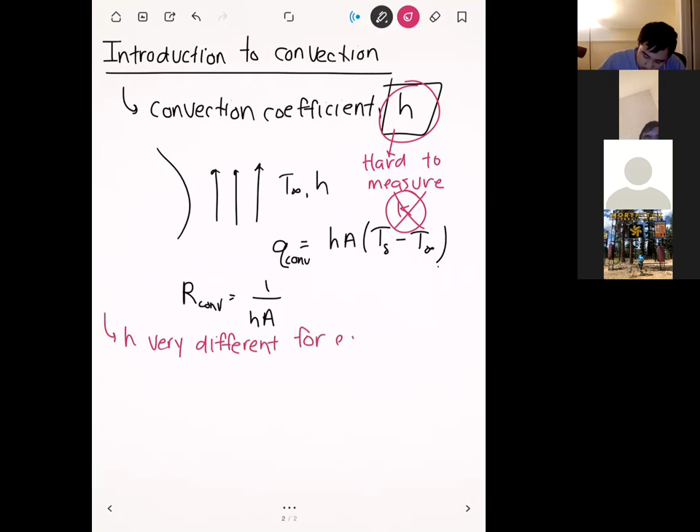And so in reality, h is not something we can just look up in a book, because h is going to be different for every situation. Okay. And I think where we left off was this expression. We talked a lot about boundary layers last time, the velocity boundary layer and the thermal boundary layer, how they interact, and we ended up with this expression for h. It's not a very useful expression, but it will at least tell us some of the things that h depends on.

Okay. So this is the formula that we got for h, based on our boundary layers. And this expression basically tells us that h depends primarily on two things. The first thing that it depends on is kf, the thermal conductivity of the fluid. So that's basically just the thermal properties of the fluid itself. If your fluid naturally conducts heat more easily, that's going to lead to a bigger h, and that makes sense, right?

Okay. And this other quantity right here, partial T partial y at y equals 0, is the temperature gradient next to the surface. And this is usually difficult to compute, because it's a property of the boundary layers, a property of the fluid flow. That's why most of the time we don't actually use this expression to compute h. But it at least gives us an idea of what h really depends on.

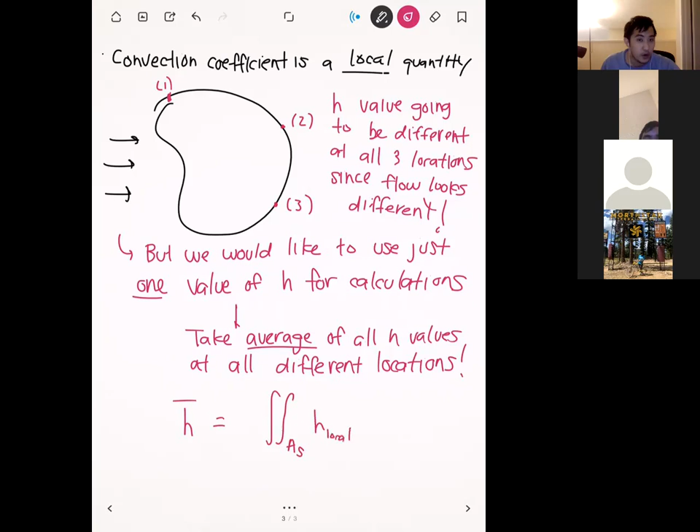If we take a double integral over a surface, and then we integrate that local h, or in other words, we're integrating all the different values of h at different points on our surface, we integrate that over a surface, and then we divide by the area. This is essentially how we would get the average h over an entire surface.

And so I will say that in terms of hand calculations or analytical methods, which is what we're doing in this class, this integral is usually too much trouble to do by hand. And so usually people will typically run a computational simulation, like either a CFD or a coupled CFD and heat transfer simulation.

And then once they get the results of that simulation, you can compute h locally all around the simulation, and then you can ask the computer to perform this integral for you. Right? And so normally this kind of integral, if you're doing more than just a single integral for any practical situation, is usually not feasible for a human to do. And so a lot of times these calculations are done via computer.

But at the very least, I want you guys to make this distinction between the average h, which is what we have been using, versus the local h, which is what it is in reality. Okay, any questions on this?

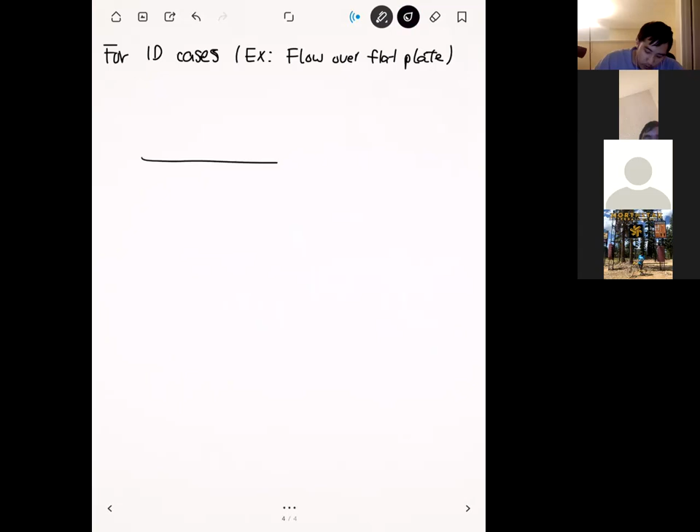Right. And so we have a flat plate that looks like this, and we have flow coming in just like that. So we have basically just one direction here, just the x direction, right? And we can say that the length of the plate here is L. In these one-dimensional cases, we can actually compute the average one because we're just integrating over one surface, right?

And so the average h in these simple one-dimensional cases is just going to be 1 over L times the integral from 0 to L of h local of x dx. Okay. And we'll do an example of this very soon.

Okay. And so even though the general case, like that surface integral that I showed you on the previous page, is a little bit too complicated to do by hand, for a simple one-dimensional case where we're just integrating in one direction, these we can actually do. And I'll show you an example of this very soon.

Okay. And so that's an introduction to h, and not only what things h depends on, but also the fact that h can actually change at various locations on the surface, right? Now let's introduce the actual problem of convection heat transfer, which is what we're going to be working on over the next few weeks.

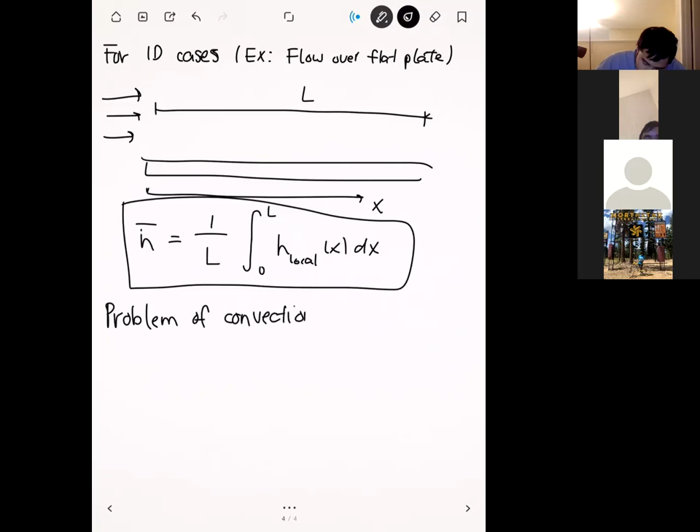And so, this problem of convection heat transfer, when you state it, it sounds fairly simple, right? But actually computing this is really complex, right? And so the idea behind this problem of convection heat transfer is this.

Because once you know H, let's say the convection coefficient for your entire surface, once you know that, then you kind of know everything that you need to know about the convection heat transfer, because then you can use any of the methods that we went over in the last unit. So you can either use thermal circuits, you can use the heat equation, right? Once H is known, then you're basically good to go.

Okay? The problem is H is seldom ever known well, right? And so, the problem of convection heat transfer is to solve for that H. And so over the next few weeks, we'll be looking at lots of different methods that we can use to solve for H. Right?

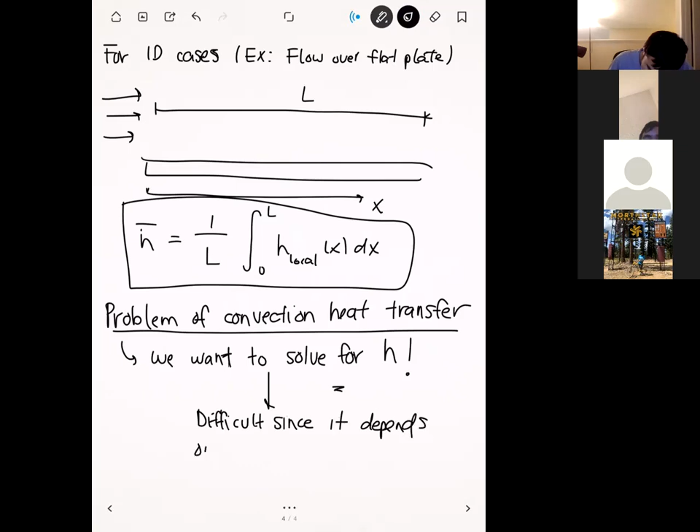And so in some sense, we're going to take a little bit of a break from all the things that we've done up to this point, and really just focus on ways that we can solve for H. Okay. And just like we talked about before, this problem of solving for H is really complicated because it depends on so many different things. Right? It depends on so many factors.

In fact, over the next couple of weeks, we'll spend one week talking about flow over an external plate, and then we'll spend another week talking about internal flow situations like flow in a pipe, right? And so coming up with a general rule and general way to solve for H right now is impossible. It's too complex for a general approach.

But for certain situations that show up pretty commonly in engineering, there are some methods out there, and some of them are based on experimental findings combined with some analytical approaches as well. Okay, and so when people talk about the problem of convection heat transfer, they explicitly are talking about how do we actually solve for H. Okay. All right. Any questions on this before we jump into a quick example?

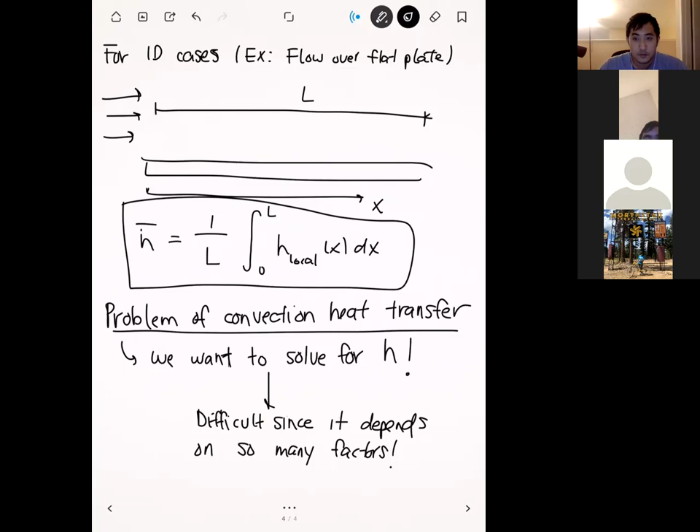Okay. All right, and so in this example, let's do a quick computation for how we can actually compute the average convection coefficient, right? All right, and so in this example, we're going to have flow over a flat plate. Okay. So this situation looks like this. And so we're going to have fluid that's going to be blowing in from this way.

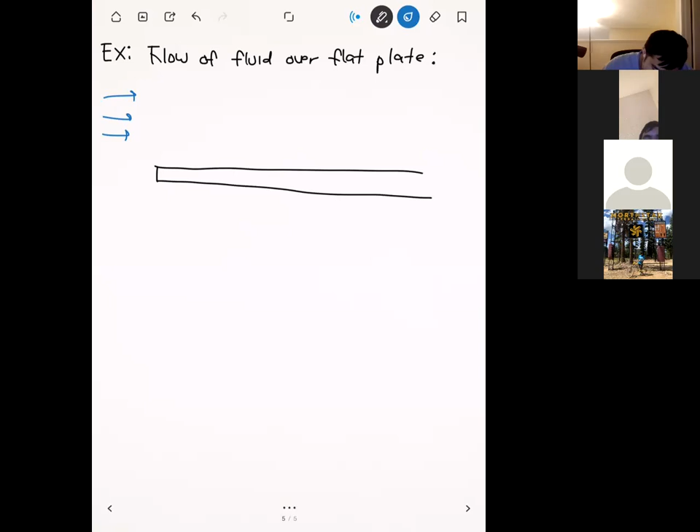Okay. And just like we talked about a week ago, once this fluid starts contacting the plate, what's going to happen is that a boundary layer is going to form. And so this line that I drew here, this is the fluid boundary layer. Okay. Where this blue line in particular, this is the boundary layer thickness. But remember, we gave it the symbol delta.

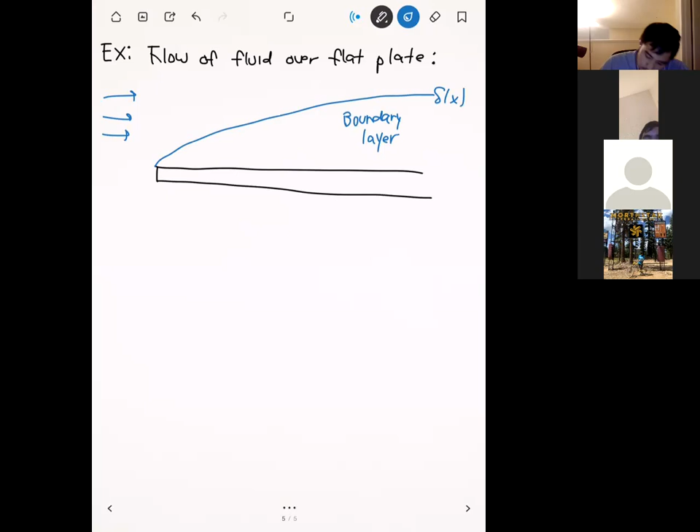Okay. And so let's say in this particular situation, for this flow over a plate, some experiments were done, and they were actually able to determine the local convection coefficient. Okay.

Okay. And so this local convection coefficient is going to be a function of x because it's going to depend on where you are. It's a function of x, right? And so we'll say that h of x is equal to a times x raised to the minus 0.1 power. Okay? Where a is just some constant.

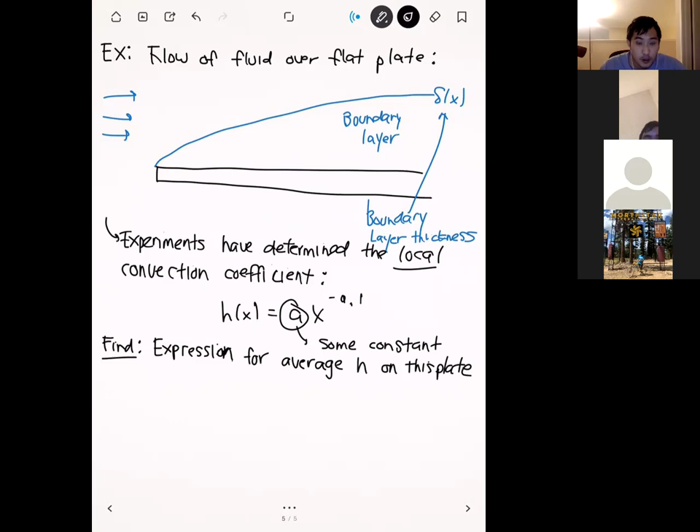Okay. And so to find the average h, we're going to use our formula that we had two pages prior, right? We're going to have h bar equal to 1 over L, integral from 0 to L of h local of x dx. Right? And then we're just going to take this expression here, plug it in for h local, and then perform the integration.

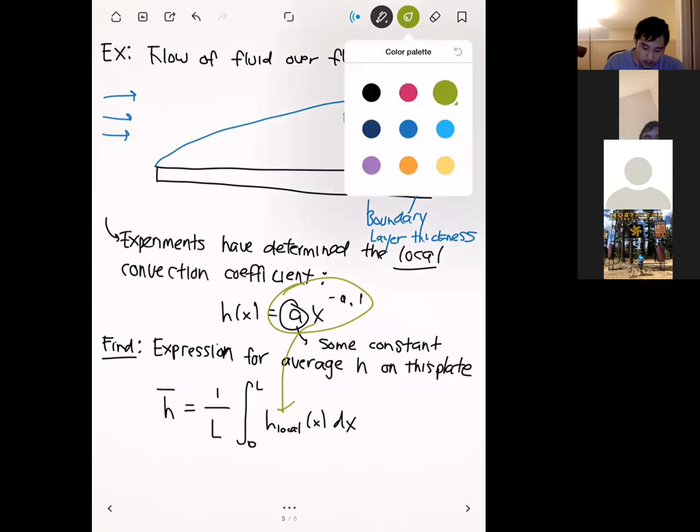Okay. So let's go ahead and do that on the next page. We have h bar is equal to, after we plug in for h local, a over L integral from 0 to L of x raised to the minus 0.1 power dx. Okay. At this point, we can integrate. If we perform this integration, we have a over L times x raised to the 0.9 divided by 0.9, evaluated from 0 to L.

Okay. No question. Oh, back one page. Yes, I can. Okay. Are you good? Okay.

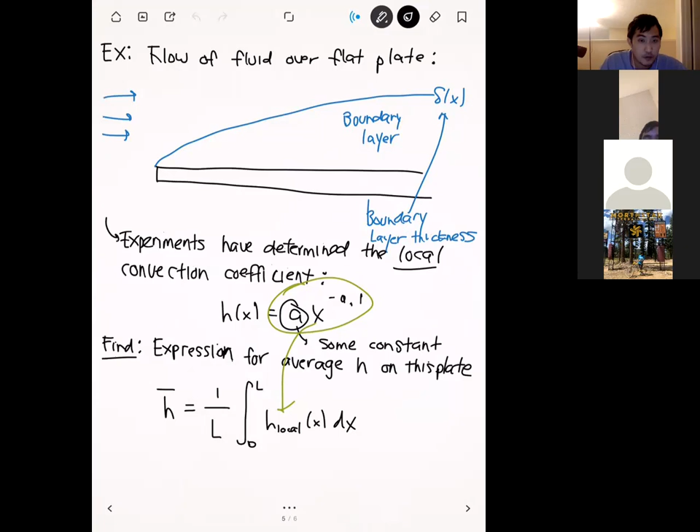Okay. And so if we evaluate this integral from 0 to L, we get h bar is equal to 1.11 a L raised to the minus 0.1 power. Okay. Right. And so this is basically the average h that we can use in calculations. Okay.

And so when you're using the methods that we'll talk about over the next few weeks, and you see that your h is a function of x, you can't use that h directly in some of our older methods, because our older methods assume just one single value for h. So in order to use our old methods, you have to take an average of h over the entire surface. Okay. All right. Any questions on this?

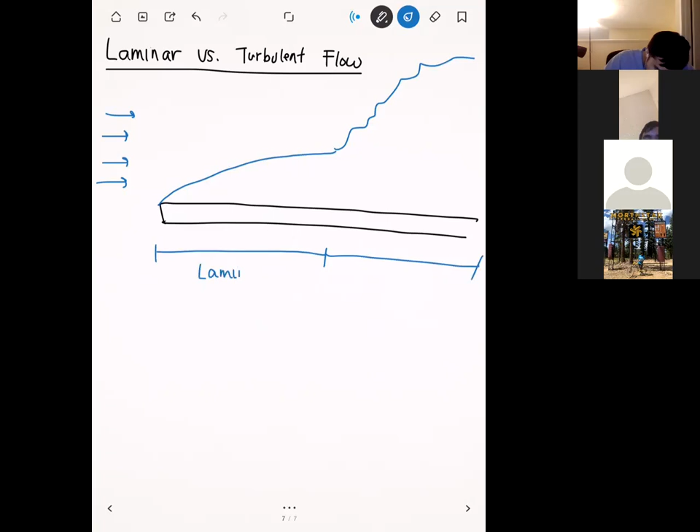And once the boundary layer starts to go crazy, we separate that from the initial part, right? This initial part of the boundary layer, where our curve is growing nice and smoothly, we call the laminar region. And where the flow starts to get a little bit crazy, we call the turbulent region.

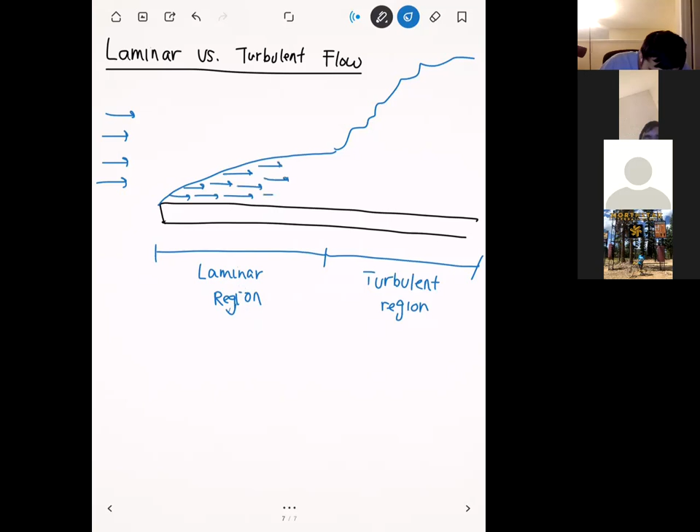And so if you look at the actual nature of the flow in these regions, you should see a stark contrast. Right? In the laminar region, the flow looks very nice and orderly. We have flow that's going parallel to each other. It's laminar. Okay? If you draw some of the streamlines, they look like this. You have a bunch of straight lines going like that.

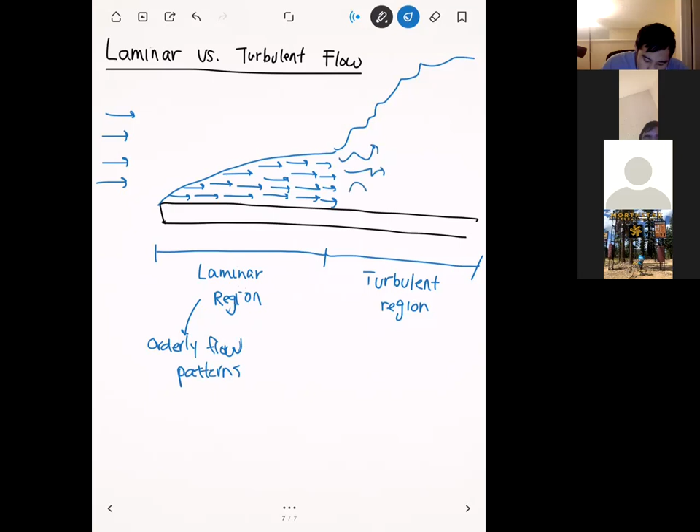And so whenever someone talks about laminar flow, basically what they mean is the flow patterns look orderly. Okay. If you contrast this with turbulent flow, it's going to look like this. Instead of being nice and straight, the flow patterns start to look really chaotic. Right? You're going to have flow that's zigging and zagging, maybe recirculating. It's going to do all these crazy things.

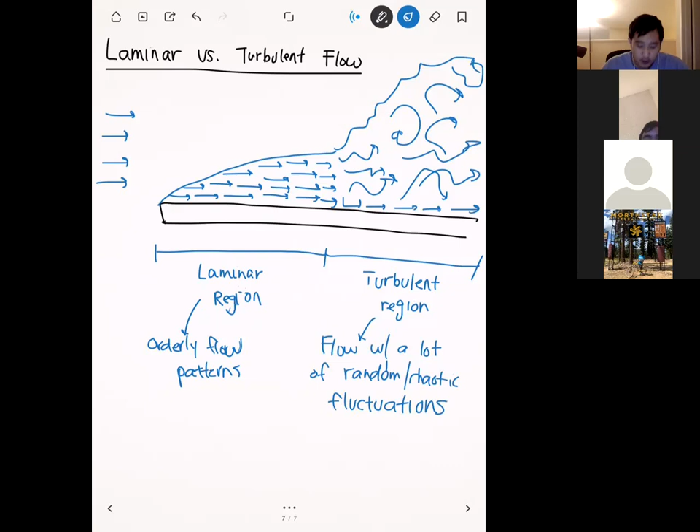Okay? Next to the wall, though, usually the flow is pretty parallel to the wall. But once you get farther away from the wall, the flow starts to get a lot more chaotic. Right? So when we talk about turbulent flow, I mean flow with a lot of chaotic random fluctuations. And I bring this up because these flow patterns are going to have a dramatic impact on the convection heat transfer.

Okay. And so it's going to be really important for us, once we start doing these convection problems, to characterize the flow, right? And so what you'll see is that if we find that we have laminar flow, that's going to allow us to use a certain set of equations and a certain kind of problem-solving methodologies. Versus if we have turbulent flow, that's going to drive us down a different path with different equations and different methodologies in order to solve the problem.

Okay? And so, beyond this, this is kind of all the fluid mechanics that you would really need. So just to summarize, whenever we say laminar flow, what we mean is nice and orderly flow. And by turbulent flow, what I mean is flow with a lot of chaotic and random fluctuations, right? And whether the flow is orderly or chaotic is going to have a big impact on our convection heat transfer.

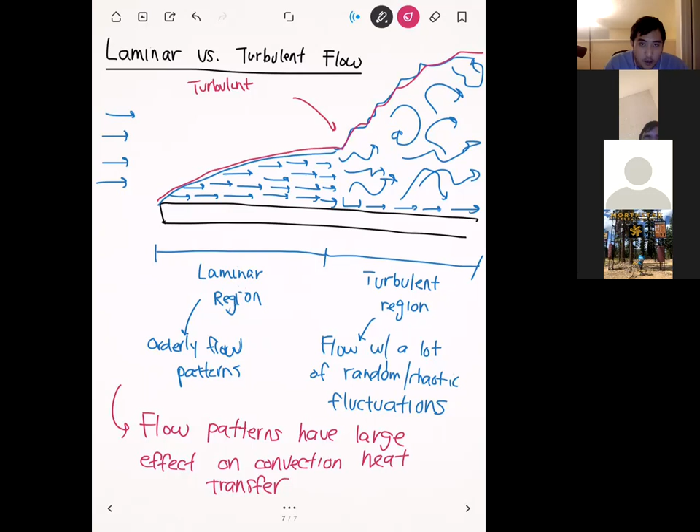Okay? One other thing that I want to note here before we turn the page is that if you notice, once I got to the turbulent region, the boundary layer just starts to jump up like this, right? And that's by design. And the reason for that is, whenever you have a turbulent flow, turbulent boundary layers will grow a lot faster.

And just like we talked about at the beginning of lecture today, where we stated that the value of h depends on the nature of the boundary layer, the fact that the turbulent boundary layer grows a lot faster is going to have a big impact on the results as well. Okay. Any questions on this?

So for the turbulent, it has a chance of pushing the heat back to the source? Well, we'll talk about that more in a bit. So actually, the fact that we have these random fluctuations is actually going to help. Because more often than not, more fluid can be pushed away from the surface. And that's why you see the boundary layer grow a little bit faster. Because any fluid that goes towards the surface is basically just going to bounce and come back up. And so you have a net flow upwards. And that actually enhances heat transfer. Okay, thank you.

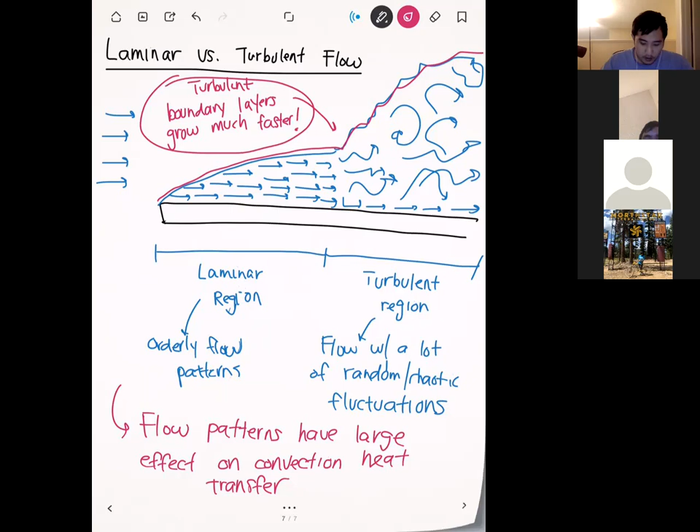Okay. And so now that we've seen the difference between laminar and turbulent boundary layers, we can see that it's going to be really important for us to determine whether a flow is laminar or turbulent. And so the way we do this is we compute a non-dimensional number called the Reynolds number. Okay. And so if you remember from fluids, the Reynolds number is given by this expression right here. And we usually give it the symbol Re.

It's computed by taking the density of the fluid multiplied by the velocity, then we multiply it by some length, and then we divide it by the viscosity. If you're given the kinematic viscosity of the fluid, which is simply dynamic viscosity divided by density, another expression is the following: we take U times L, and we divide it by nu. Okay. And so let me label all of the terms here. First we have rho, and this is simply density. U infinity right here, this is the free stream velocity.

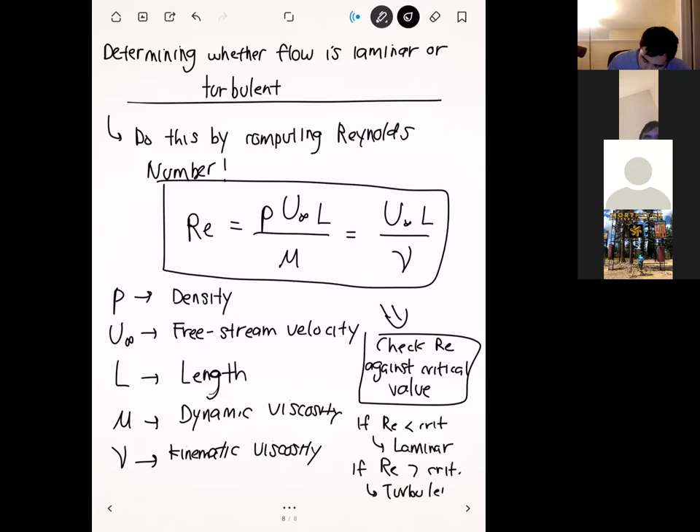And if the Reynolds number is less than the critical value, what this tells us is that we have a laminar flow. But if the Reynolds number is greater than the critical value, then this tells us we have turbulent flow. And so that's all it is basically.

And so, to determine whether a flow is laminar or turbulent, all you're going to have to do is compute the Reynolds number and check it against the critical value. If it's less than that, you're laminar. If it's greater than that, then you're turbulent.

And so, what the critical Reynolds number is really depends on the situation. External flow situations have a certain critical Reynolds number. Internal flow has another critical Reynolds number. So depending on the situation, we're going to have a different value for the critical. The idea is the same: you're always going to compare the Reynolds number to this critical one and use that to determine if the flow is laminar or turbulent.

Okay. Any questions on this? Okay.

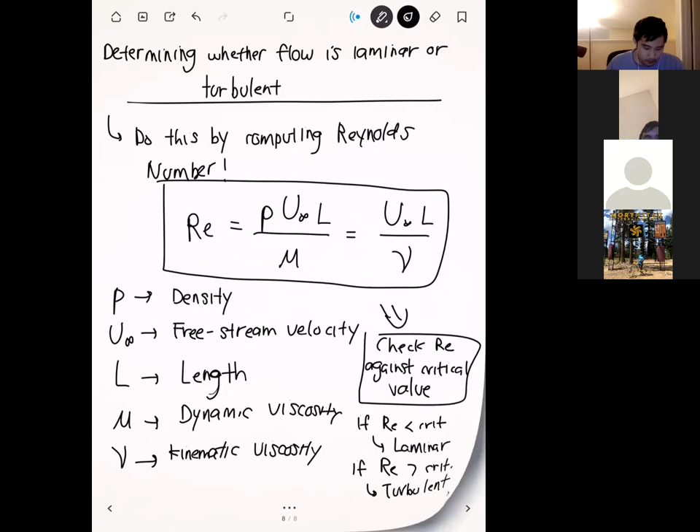And so, now that we've talked about laminar and turbulent flows, let's talk a bit about how the velocity and temperature vary within the boundary layer. In particular, how these things vary in the presence of laminar flow versus turbulent flow, because depending on the nature of the flow, these things are going to look different. So let's start with velocity.

If you remember from last week, in the boundary layer the velocity varies from 0 at the plate up until the free stream velocity. So let me draw two situations here. On the left, I'll draw the laminar situation, and the turbulent one. The endpoints are going to be the same. For the laminar case, here is our plate, and at the plate we're going to have 0 velocity.

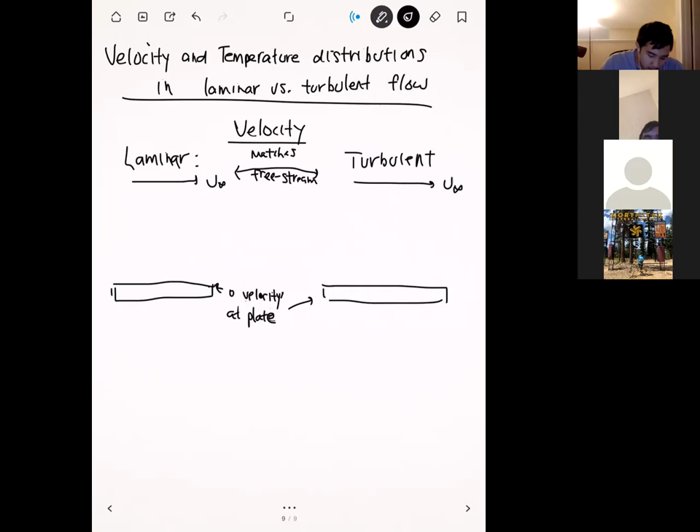So if we travel a certain distance away from the plate, the velocity matches the free stream. The endpoints are going to be the same, but how they vary from the plate up until the free stream is going to be different. For a laminar boundary layer, what you have is a very nice gentle variation from the plate condition to the free stream. It almost looks like a parabola.

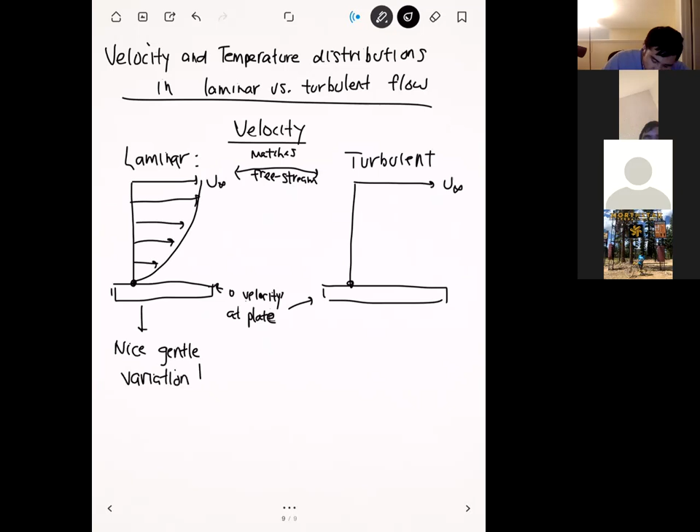So here we have a nice gentle variation between the plate condition and the free stream. For the turbulent one, it's a little bit more violent. In the turbulent boundary layer you have a very large change very quickly, and then from there it kind of tapers off just like that. So what you have here is a rapid change initially. Then after that rapid change, the change starts to slow down.

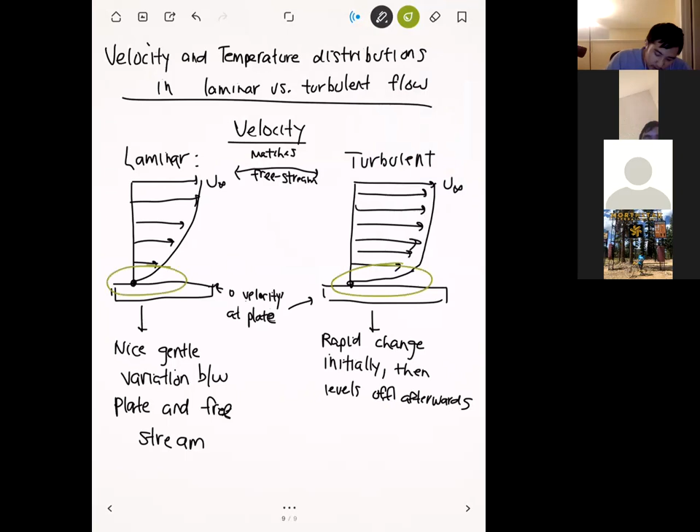All right. So even though the endpoints are going to be the same for the laminar and turbulent boundary layer, how they get there is going to be different. And the significant thing, relating this to what we talked about at the beginning, is if we look at the region right next to the plate, you should see that when you have turbulence, this near wall derivative or near wall gradient is much more extreme.

Remember, we characterized this near wall gradient with partial u partial y. If we have turbulence, then this du/dy is going to be greater. And if that derivative partial u partial y is greater in turbulence, that's going to give us a higher amount of viscous shear stress, because viscous shear stress depends on the viscosity of the fluid and also that near wall gradient.

So if you covered boundary layers in your fluids class, hopefully one thing you talked about was that if you have turbulent flow, then you have a higher viscous friction force. And the reason why is because you have much sharper velocity gradients next to the wall compared to the laminar case.

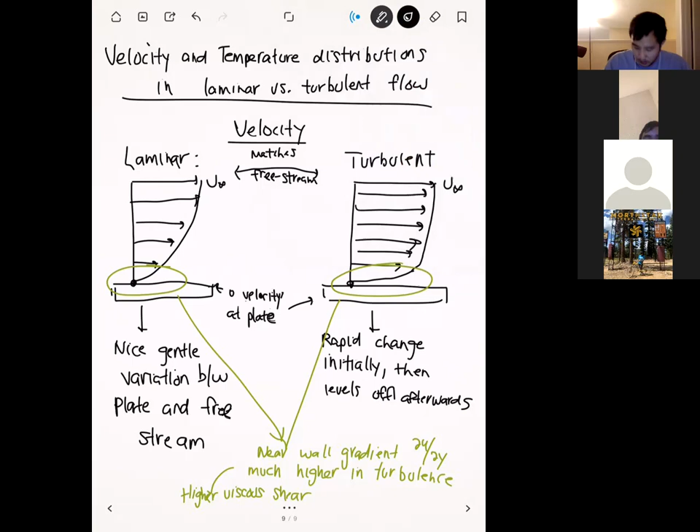Okay, so this was the variation of velocity in a laminar versus turbulent boundary layer. Now we're going to do the same thing for temperature, and then we'll talk about how that affects the convection heat transfer. All right, any questions on this? Okay. All right, so let's look at temperature.

Just like the velocity, I'm going to draw two diagrams here: one for laminar flow and one for turbulent flow. We're going to have a plate condition, and the plate condition is going to be the same in both cases. In both cases, the plate is going to be at a temperature Ts.

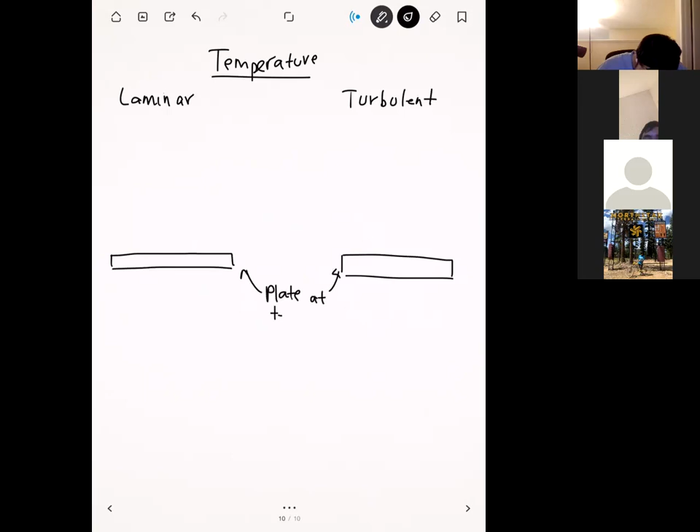Okay. Right, and so we have Ts on both sides. And then just like the velocity boundary layer, at the top of this graph, we're going to have the free stream condition, which is T infinity. Okay. And then we'll say that the free stream temperature we'll assume is less than the surface temperature. Right?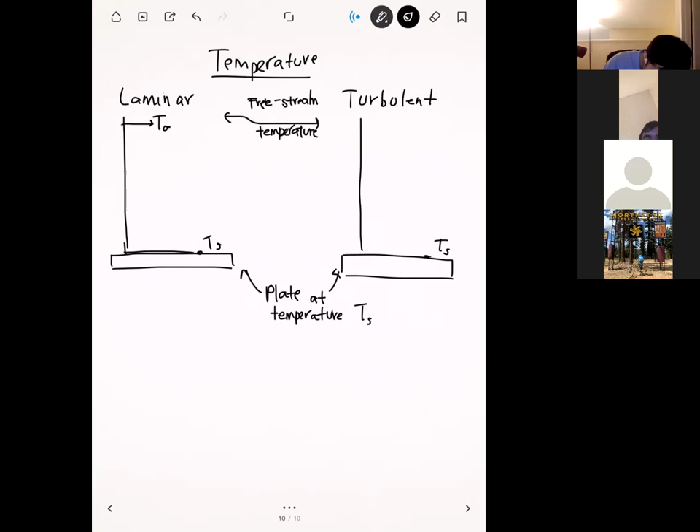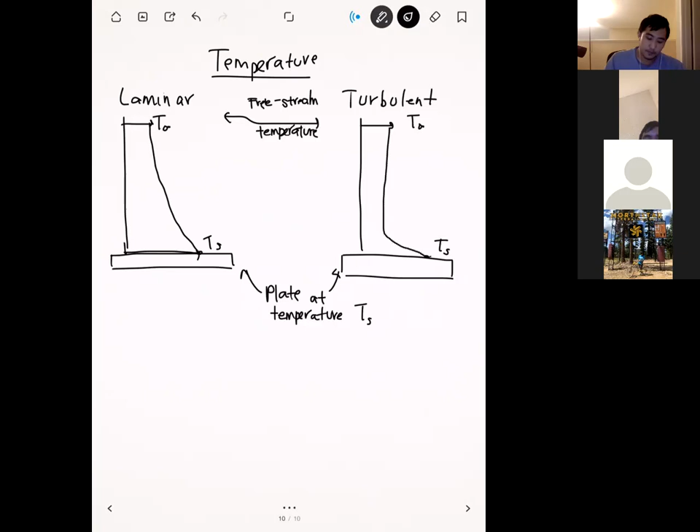And so, just like the velocity case, we have the same endpoints here, but what's going to be different is how they're going to vary, right? And so just like the velocity case, if you have a laminar boundary layer, what you have is a nice steady change in between the two. Okay? Versus if you have a turbulent boundary layer, you're going to have a rapid change at first, and then it's going to taper off after that. Right? So it's going to look more like this. Okay? And so this is gentle variation. And so when you have turbulence, this is much more violent and much more rapid. Right?

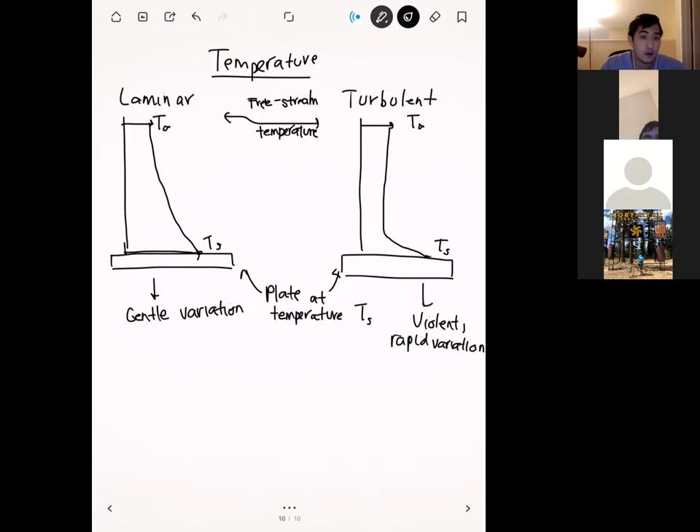Okay. Right. And once again, what you should see is that in the near wall region, if you have turbulence, that's going to increase your wall gradient, right? And so if we compare the values of dT/dy at both cases, this is for laminar, and this is for turbulence, right? So we compare the derivative of temperature near the wall. What you're going to see is that dT/dy in the turbulent case is going to be much, much higher. Okay?

And if you remember, from the beginning of the lecture today, what we saw was that the convection coefficient h depends on this temperature derivative, right? And so because the convection coefficient depends on this, what you'll see, hence, is that if you compare h laminar to h turbulent, h turbulent is generally higher than h laminar. Okay. Okay.

And so, if you want to enhance your convection heat transfer from your surface more, it's better to actually have turbulent flow. Because a lot of the chaos in the flow actually enhances your heat transfer, kind of like what I mentioned before, right?

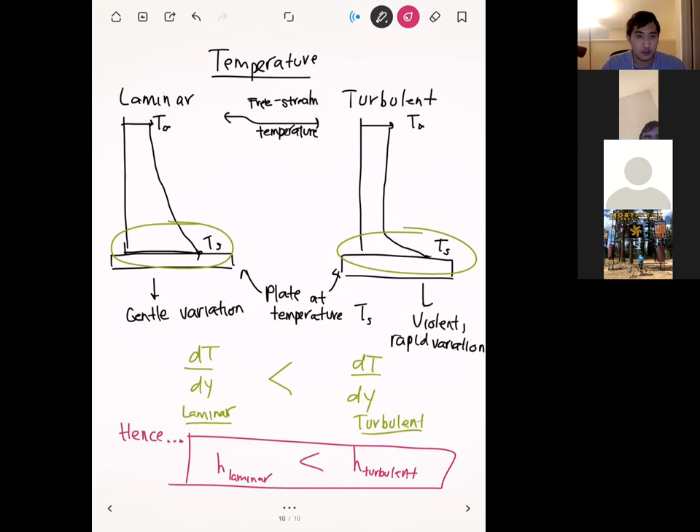Okay. And so let me just write down physically what's going on, or the physical reason why we get more heat transfer in turbulence. Okay. And it kind of boils down to the flow patterns, right? And so if you remember from the original diagram that we drew of laminar versus turbulent, turbulence had a lot more chaotic fluid motion.

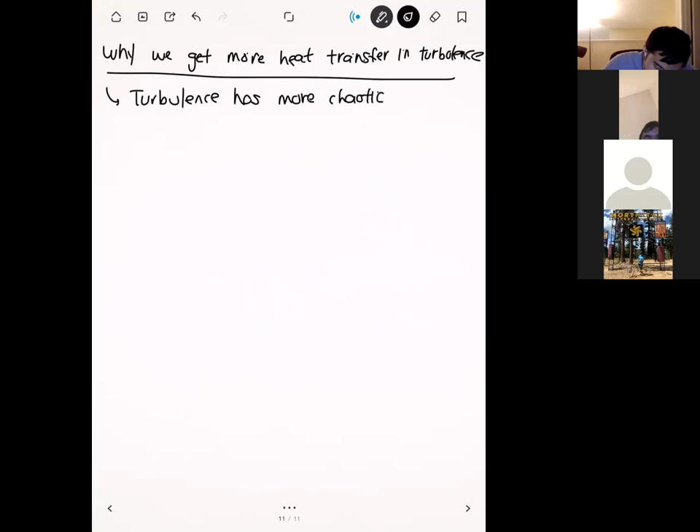And because we have much more chaotic fluid motion, it enhances the mixing of the fluids within the boundary layer. Okay. And so you can think of it as, because we have this chaotic motion and this mixing, fresh fluid is being brought to the surface a lot more quickly or a lot more often than in laminar flow.

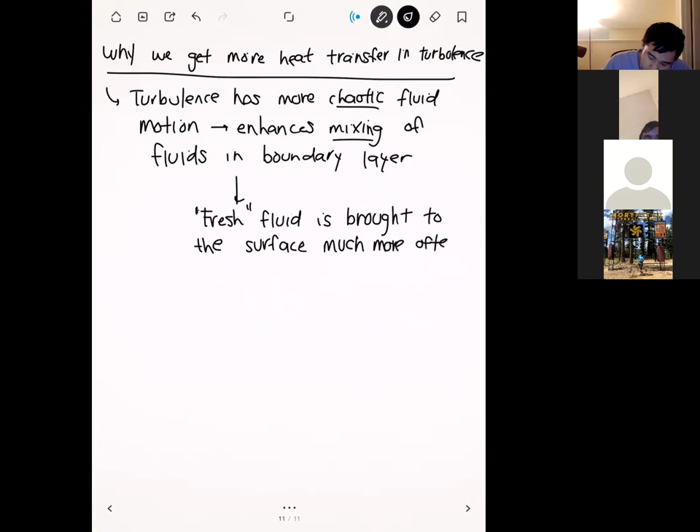Okay. And so if we draw a case right here, right? Let's say I'll draw our two regions here, right? So we'll have laminar and turbulent.

Okay. Right. In the laminar case, what you have is the flow is strictly just going from left to right, okay? And so that's fine. And so what that's going to do is, once these fluid particles heat up, they kind of get swept along the flow that way, right?

But in the turbulent boundary layer, not only is there a bulk motion from left to right, because of this chaotic motion, some fluid from the surface is going to come up here, and some fluid from the top of the boundary layer is going to go towards the surface right there, right? And this is constantly happening because of the chaos.

And so because of that, what tends to happen in turbulent flow is that a fluid particle will heat up. Then because of the chaotic motion, it'll be swept up towards the top of the boundary layer and be replaced with some other fresh fluid that goes down there, right? And so because you have this circulation and chaos, more fresh fluid is brought to the surface, which helps to enhance heat transfer, because then we maximize that temperature difference as much as we can.

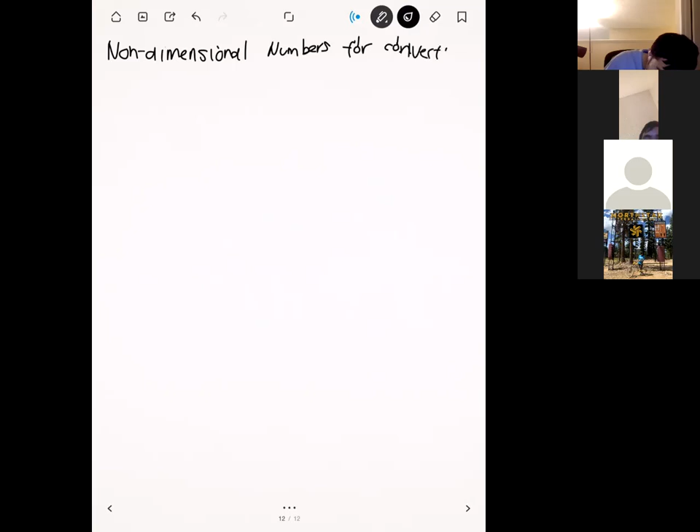Okay, so hopefully you've seen non-dimensional numbers before. Actually, we've already seen one in this lecture, right? Non-dimensional numbers are common in science because they often report a ratio. What I mean by non-dimensional numbers is that they basically have no dimensions. It doesn't have meters, newtons, joules or watts or anything like that. So it's totally dimensionless.

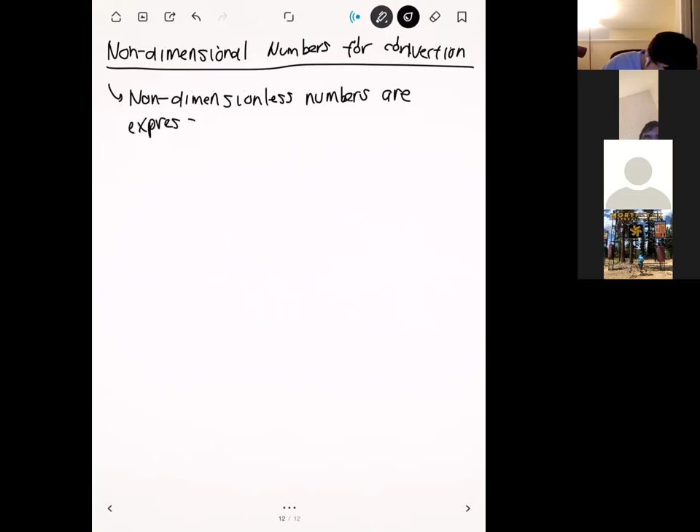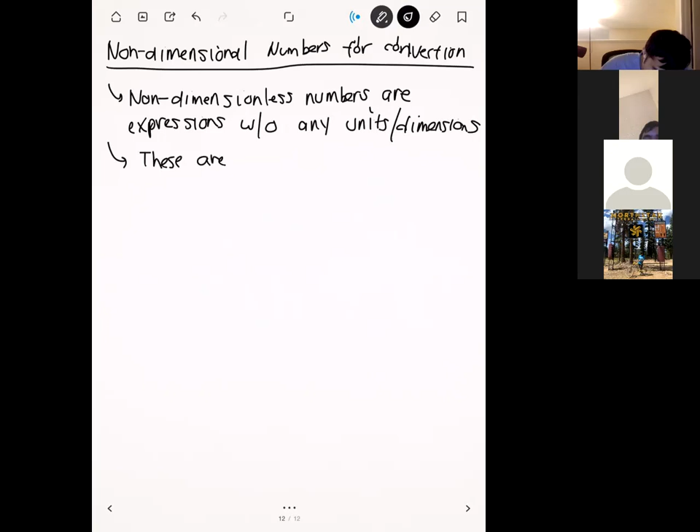And so they have no units or dimensions, and the reason for that is because they're usually ratios, right? A ratio is nothing more than a division between one quantity and another. And oftentimes, just to make sure you're comparing apples to apples, what you have on top and the bottom has the exact same units.

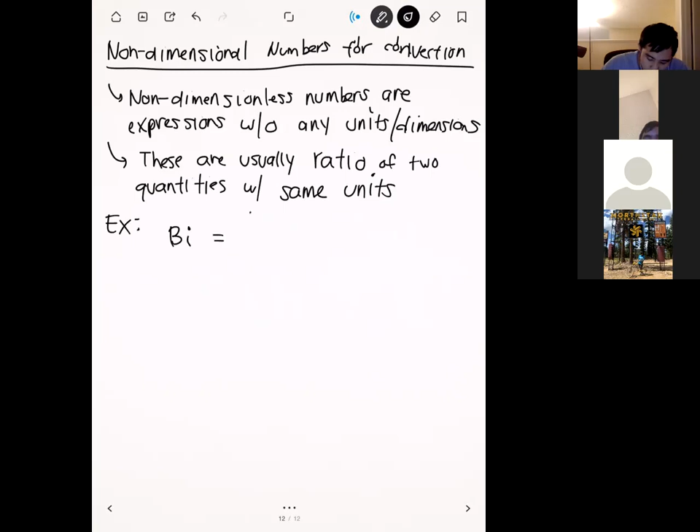And actually, we've seen one in the previous unit, right? We've worked with the Biot number. You remember the way we compute it is hL divided by k, right? And what we said back then was that the Biot number was a ratio between convection heat transfer over conduction heat transfer. Since we're taking a ratio of two things with the same units, those units cancel out and we get something without units, right?

But just because we have no units doesn't mean it doesn't express anything. In fact, the Biot number would tell us whether we can use the lumped capacitance method or not, right? Because one of the conditions for the lumped capacitance method was that our object was all the same temperature. For that to happen, conduction heat transfer needs to be much stronger than convection. That's why we had that check to see if the Biot number was less than 0.1.

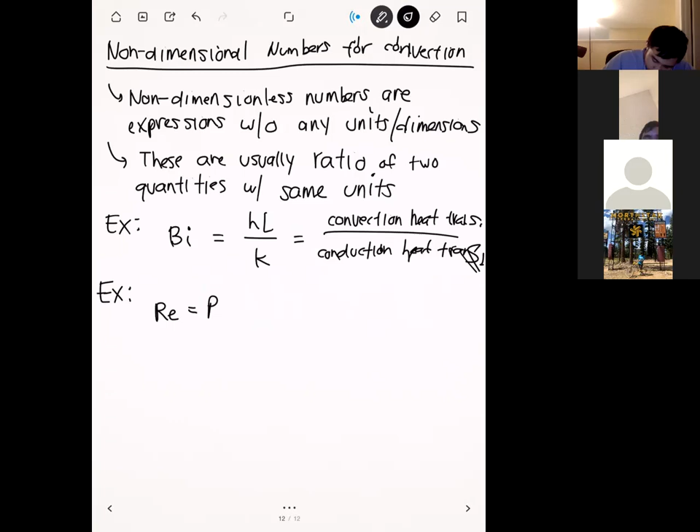And we've already seen another non-dimensional number in this very lecture, right? That's the Reynolds number. The Reynolds number is rho U L divided by mu. And just like the Biot number, this is a ratio. It's a ratio of inertial fluid forces over viscous fluid forces. Okay.

Inertia is the forces associated with motion in a fluid, and viscous fluid forces are forces associated with viscous shear stress. What tends to happen in fluids is that as inertia starts to dominate, or as the fluid gets faster and has more momentum, that usually makes the fluid turn turbulent. So another way to interpret the Reynolds number is that as the inertial forces get higher relative to the viscous forces, that's what makes the fluid turn turbulent.

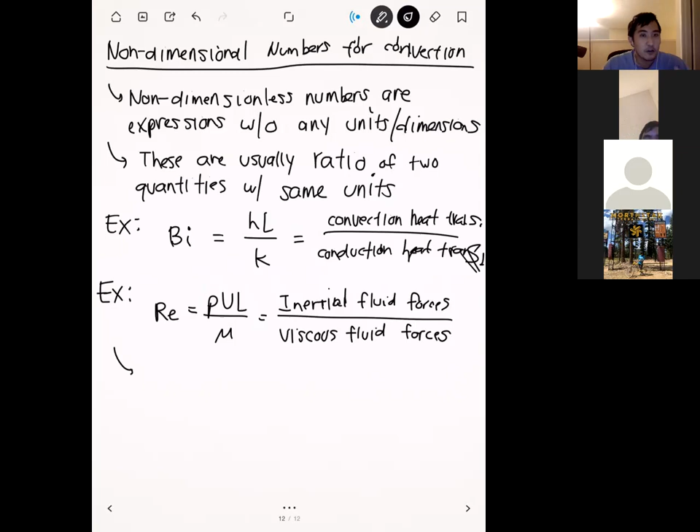Okay. And so the way we usually obtain these non-dimensional numbers, in general, is by taking your governing equations and non-dimensionalizing them.

Okay. And so, for the Reynolds number, if you wanted to derive that or get its expression, what you would do is you would take the Navier-Stokes equations and you would just non-dimensionalize everything. And so what I mean by non-dimensionalize is that you plug in a characteristic expression for all the variables, right? So you plug in a characteristic length, characteristic velocity, and all that stuff.

And so this process of non-dimensionalizing an equation, if you haven't seen it yet, it's probably not surprising because usually this is kind of a graduate thing. So I usually don't do this. I usually only do this with my grad students, especially for grad fluids. And so we're not going to do that here. But I do want to let you know that this is kind of where it comes from.

And the two new dimensionless numbers that we're going to talk about, you can obtain these by non-dimensionalizing the heat equation, which is generally our governing equation for heat transfer. Okay. And so the process through which we obtain these non-dimensional numbers, for this class, is not super important. So I would never ask you to derive these non-dimensional numbers. But I just want to let you know where they come from because we're going to be working with them a lot over the next few weeks. Okay. All right. Any questions on this?

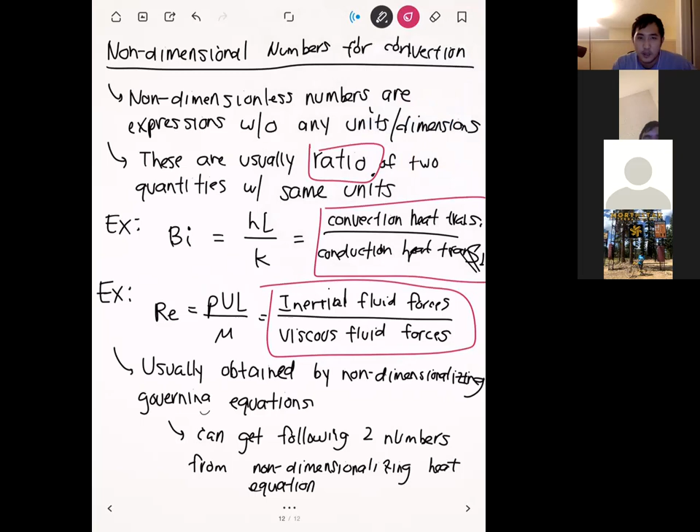And so I want you to focus more on what I've boxed in red right here, which is what they represent, because it's one thing to be able to compute a non-dimensional number, but to really use it in practice and to really understand it, you have to understand what it physically means. Okay, so let's start with the first number that we'll talk about, which is called the Nusselt number.

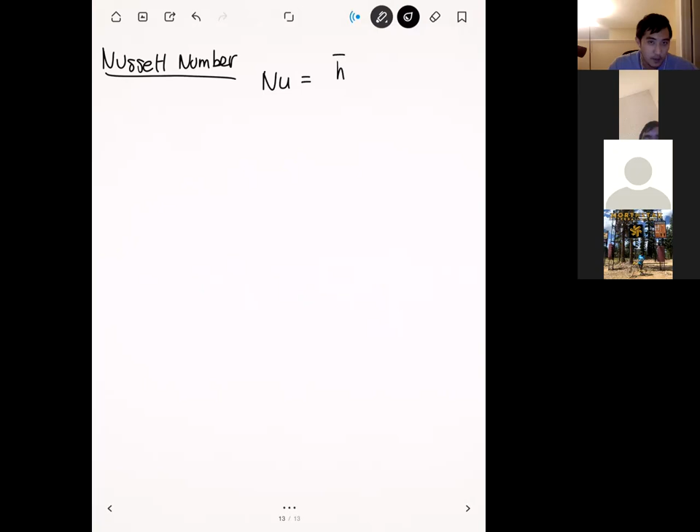Right. So it sounds like the name of a candy bar or something, but it was the name of a dude. He studied heat transfer a lot, right? And so the Nusselt number we'll give the symbol Nu. And the way that we compute it is we take the average convection coefficient, h bar, multiplied by L, divided by k_f. Okay. So let me label these guys.

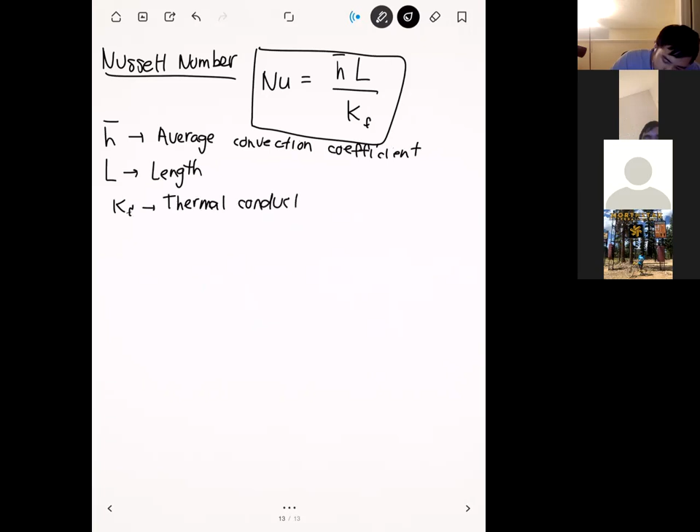So h bar here, this is the average convection coefficient. Okay. L, simply just a length. And then k_f right here, this is the thermal conductivity for the fluid. Okay. All right.

And so probably what you're thinking, because I just wrote it on this past page, is that the Nusselt number looks exactly the same as our Biot number, right? So Nusselt is just hL over k_f, and then Biot is also hL over k, right? And so you kind of already understand what the Nusselt number is. It represents the same thing. So it's a ratio of basically convection heat transfer to conduction heat transfer in a fluid.

And so I don't really know the history behind this number. So I don't know if the Biot number came first or the Nusselt number came first, but it kind of looks like one person copied the other one. Okay? Because the Biot number, we typically use that for solids, and the Nusselt number, we usually use for fluids, right?

And so I don't know which one came first, but if these are the rules that science is playing by, then I can define this exact same number, but I can do it for orange soda. And so I can say that can be the Justin number, which is the convection coefficient times the diameter of the soda can divided by the thermal conductivity of orange soda, and we can call that the Justin number. But I don't write the rules; I just teach it. So maybe that's not allowed.

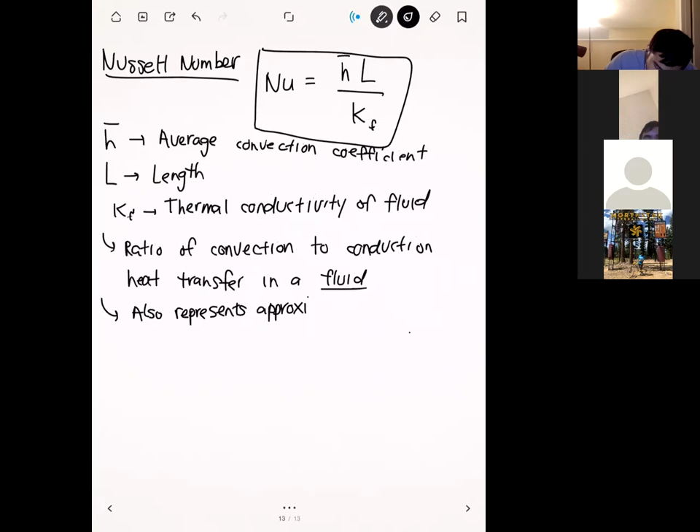But there's one more thing I want you to know about the Nusselt number, kind of related to what we were talking about earlier in terms of temperature gradients and things like that in the boundary layer, right? Another interpretation of the Nusselt number is that you can use it to compute the approximate magnitude of the temperature gradient near the surface. And so the higher your Nusselt number is, the higher that temperature gradient is going to be, right?

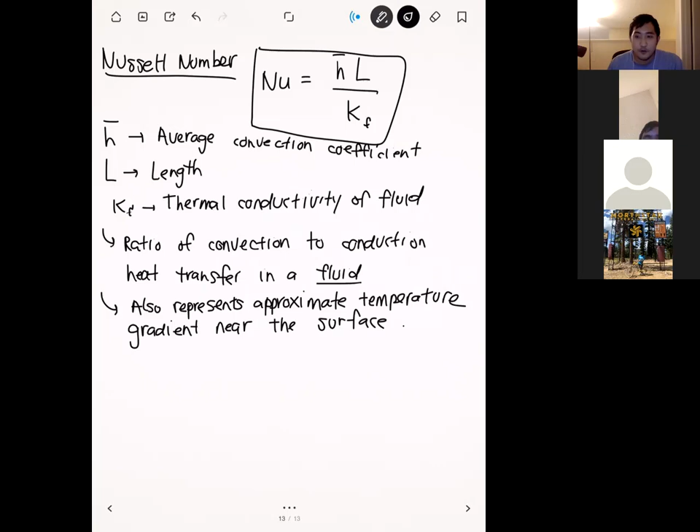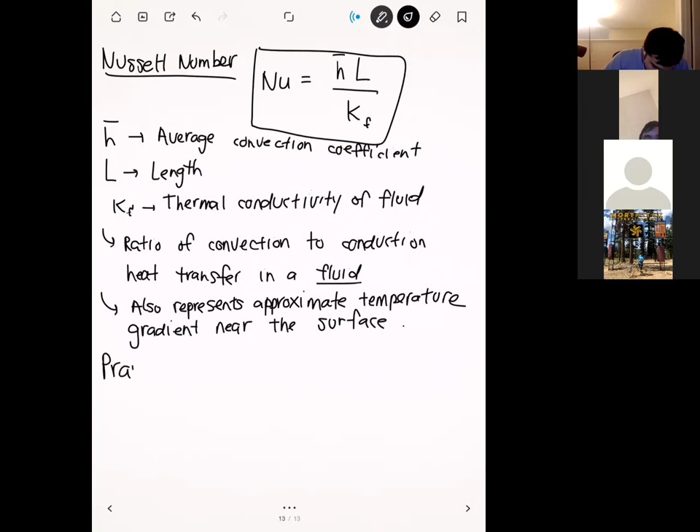And so what we'll see over the next couple of weeks is that we'll have two ways that we can compute Nusselt number. We'll have one formula that's from laminar flow, and then we'll have another formula for Nusselt number with turbulent flow. And what you'll see is that in general, the Nusselt number formula for turbulent flow will be higher, because the temperature gradient in turbulent flow is just higher. Okay. All right, and so that's the Nusselt number.

Right, and so next we'll have Prandtl number. Okay. And Prandtl number is just a very simple ratio here. It's a ratio of nu divided by alpha. Right. Where nu here is the kinematic viscosity of the fluid. And alpha, this is something that we saw very early on in the class. This is the thermal diffusivity.

And even though these things might seem like they're very different ideas, right? So one you have viscosity, next you have a very thermal quantity. Actually these two have the exact same units, and the units for both are typically meter squared over second. Right? And so because they have the same units, they cancel out, and we have kind of a proper ratio. Okay. And so this Prandtl number is going to be a ratio between these two things, and I'll tell you how to physically interpret that on the next page. Okay. Any questions on this so far?

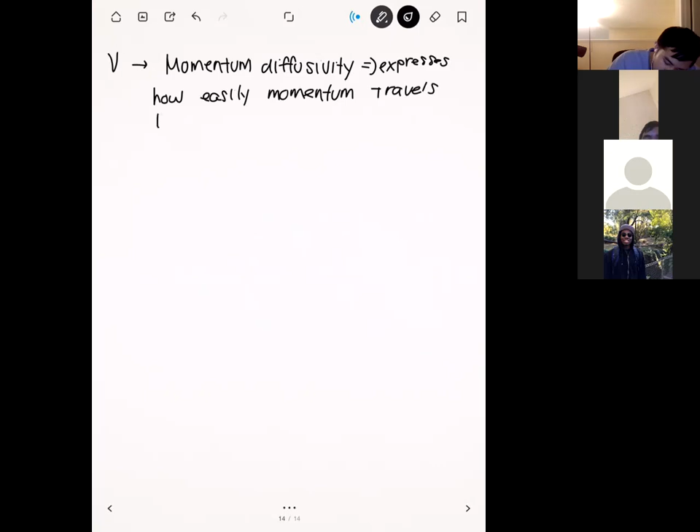All right. I think we had a brief discussion of this last time with the honey jar, right? If you take a jar of honey and turn it upside down, it takes a while for that honey to come out. And the reason for that is because the walls of the jar themselves are stationary, right? So you can say that they have zero momentum. And because honey is a very viscous fluid, momentum travels really easily throughout that fluid, right? So the fact that the walls of the jar have zero momentum, that information travels through the fluid very easily in honey, right?

And so that causes the honey to flow really slowly, because the fluid next to the walls of the honey jar is basically saying, hey, we're not moving here. We're sticking to the jar, and that information travels really quickly throughout the honey. Right? You compare that to a glass of water, which has relatively low viscosity, right? You turn that upside down, the fluid next to the walls will stick, but that information doesn't travel that quickly throughout the fluid, right? And so gravity takes over, water spills onto your desk, it gets everything wet, you're upset, and it's not a good thing.

Okay. And so viscosity here, you can think of it as how well momentum travels. Right? And with that in mind, alpha here is thermal diffusivity. Right? If you remember from early on in the class, thermal diffusivity is kind of a combination of heat capacity, thermal conductivity, and all that stuff. And this basically expresses how easily thermal energy travels in the fluid. Right?

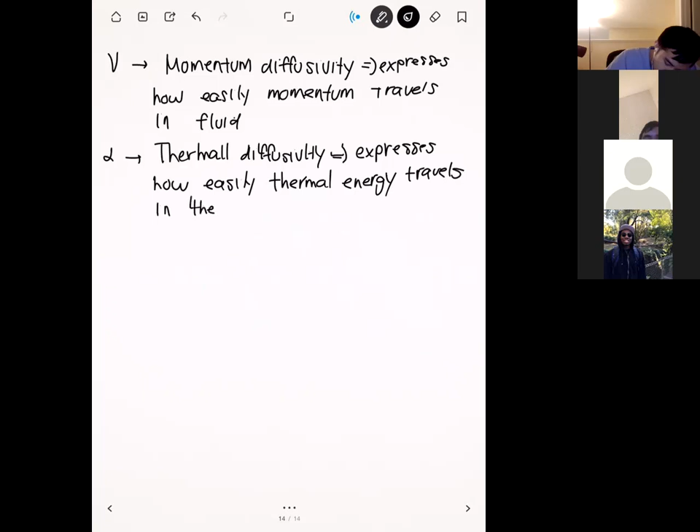Okay. Great. And the Prandtl number is basically just a ratio of these two quantities. Okay? And so the upside of this is that the viscosity and the thermal diffusivity are the primary parameters that determine how quickly the boundary layers grow.

Because if you remember from last Monday, when we talk about the boundary layer, there's two boundary layers, right? So we have the fluid boundary layer, which is the velocity boundary layer, and we have the thermal one, right? And if you remember from last week, these two things usually don't coincide, and so usually one grows faster than the other one, right?

And so what this Prandtl number does, because it's the ratio between viscosity and thermal diffusivity, basically what the Prandtl number tells you is how fast one boundary layer will grow relative to the other one. Okay.

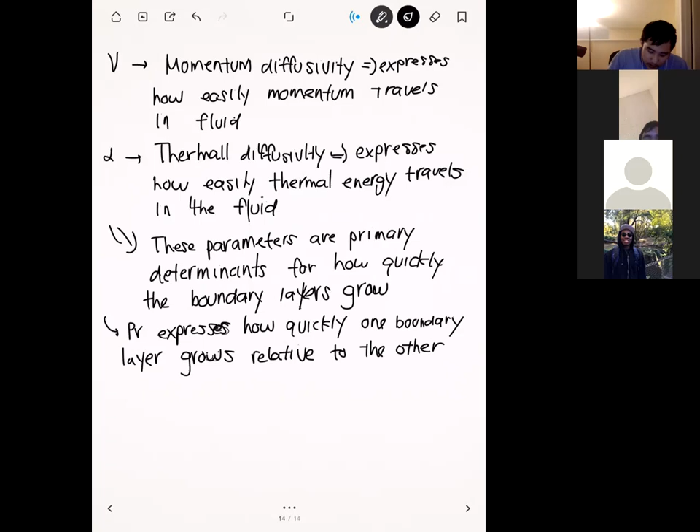Our question. So, what would be an example of momentum diffusivity? So, the example is the honey jar, basically what I told you, right? And so another example that you can do, which I don't recommend because it would take a lot of honey, is that you can fill a container with the fluid, right? And then this container would have to have a bottom which you pull out, right?

Right. And so what you should see is if you try to do this experiment with honey and you pull the bottom out, the entire thing of honey is going to start to travel towards you, right? That's because the momentum of the bottom layer is going to basically travel up through the fluid really quickly.

But if you do the same experiment with water, right? So you fill a container with water, you pull out the bottom. What's going to happen is that eventually the top of the fluid will start to move, but it might take a little bit of time because the viscosity of water is not that high.

All right. Any final questions on this before we end for today? Okay. All right. So there's a little bit more of this that I want to talk about on the Prandtl number, and so we'll wrap that up on Wednesday, and then from there we'll launch into the next set of lecture notes, which is external convection.